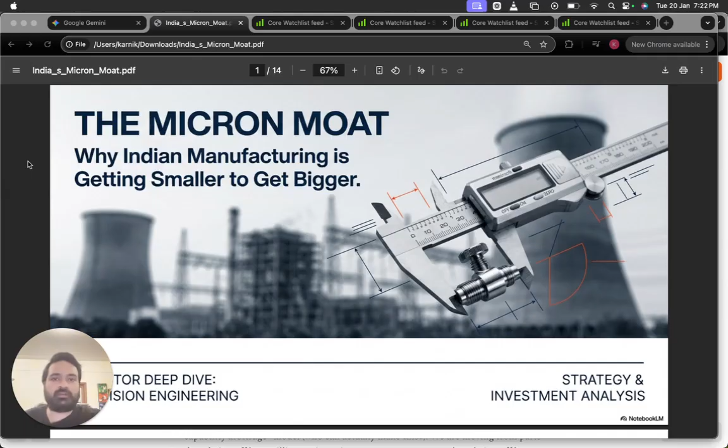Slowly, a quiet revolution started happening in the background. Our manufacturing started taking off, not only in terms of scale and capacities, but also in terms of the processes. We started innovating, we stopped just bending metal and started cutting edge engineering and technology based manufacturing. We're moving from cost arbitrage to capability arbitrage.

We're moving from manufacturing processes where being off by a couple of millimeters was okay, to now, in precision engineering, where a defect of 1 micron - which is 1/50th the width of a human hair, 2% the width of a human hair - that kind of tolerance, that kind of mismatch in expectations can lead to a nuclear reactor shutting down or a plane crashing.

This is exactly why this industry is so specialized, why it has high barriers to entry, and why players in this industry need years of audit and permissions before they get approved by their vendors or customers.

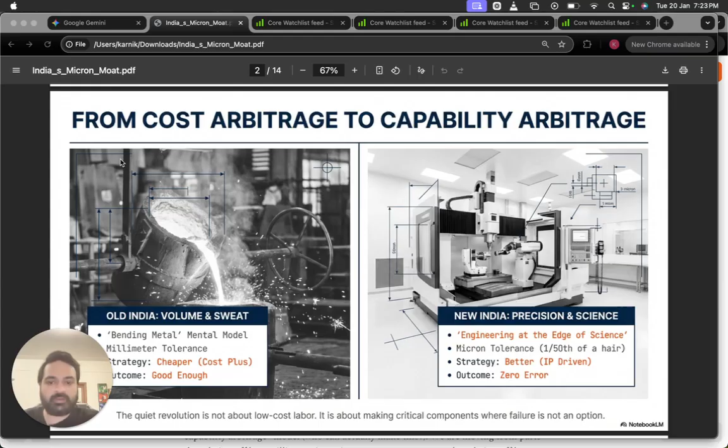This is basically the traditional old Indian model, where millimeter tolerances were okay, where we were basically following a cost plus model, and the outcome was good enough as long as we were almost there. With precision engineering, a micron tolerance mismatch can lead to catastrophic consequences.

The strategy is IP driven as opposed to cost arbitrage, and there is absolutely no room for error. So now it's not about low cost labor, but about making critical, mission critical components where failure is not an option. Because, as we'll discuss in this video, clients for many of these companies are either aerospace companies, nuclear companies, or defense companies.

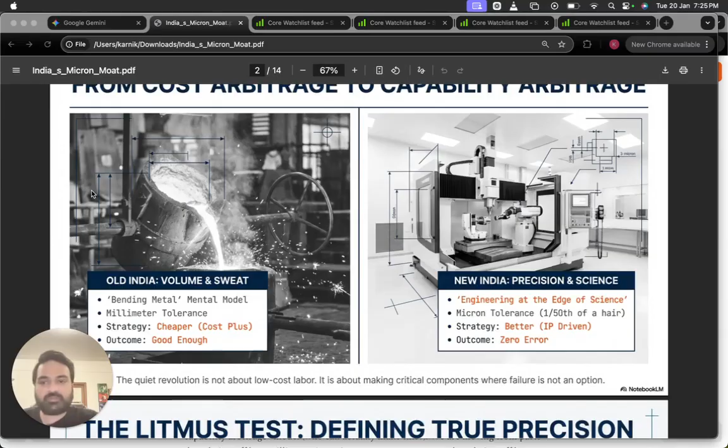And although these parts may constitute 1% of the total cost of the final product - in the case of an airplane, it might be less than 1% of the cost - despite that small cost, if there's even a slight mismatch, it can lead to disaster. So this is basically the litmus test on what defines it.

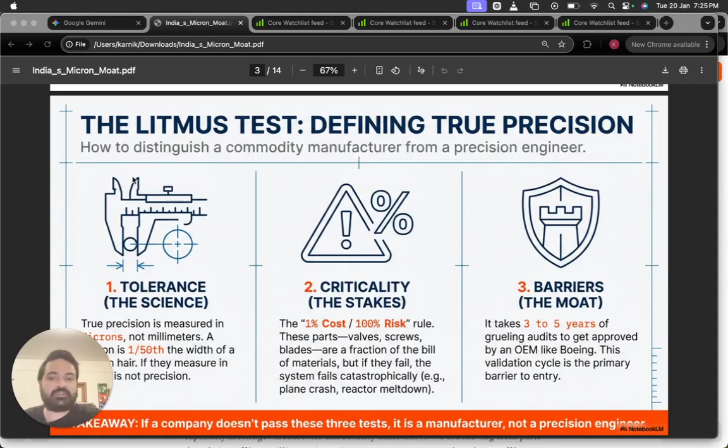A lot of companies call themselves precision engineering companies, but how do you distinguish a commodity manufacturer from a precision engineer? The first and most important thing is tolerance, because precision engineering is happening in microns, not millimeters. 1 micron, as I repeat, is 1/50th the width of a human hair. So if their measurements are in millimeters and above, it's not precision engineering.

Two is the criticality, which I just spoke about - the 1% cost, 100% risk rule. Basically, these parts are like valves, screws, blades. They're a fraction of the bill of an aircraft, or a rocket, or a nuclear reactor. But if they fail, there's catastrophe.

And thirdly is the barriers to entry. It takes 3 to 5 years of grueling audits to get approved by OEMs like Boeing and Airbus. So this validation cycle is the primary barrier to this industry.

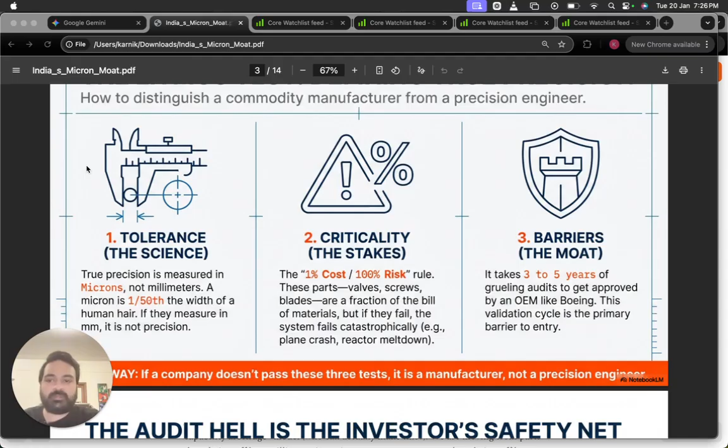This is basically elaborating that point - the switching costs are just so high that it's not worth changing suppliers to save a few pennies. Once you're approved, it usually leads to recurring orders for many years, because certification and audit also takes up to 3 to 5 years.

So the key is really getting approvals from marquee OEMs, because once that's done, that's more than half the battle - obviously, as long as your parts and components keep meeting the rigorous standards that are expected.

So this is basically the entire value chain of this industry. Let's go from top to bottom. At the bottom of the pyramid, we have companies that provide raw materials. These are exotic alloys, companies like Midhani, which is a government company. Margins here are the lowest, hovering between 12 and 14%. We'll discuss all these companies in more detail.

Next in the pyramid is the precision machining companies. At this stage, you basically take the metal and cut it to perfection using 5-axis CNC machines. Margins in this tier hover between 18 and 22%. Some companies here are OBSC Perfection, Azad Engineering, and Maini, which is a subsidiary of Raymond.

Then we have the subsystem integrators. These are companies that take many individual components and integrate them together, assembling a full module. Companies like Dynamatic Technologies make structures and substructures for Airbus and Boeing. Then you have Data Patterns, which makes electronic warfare systems and radars. And you have Sona BLW.

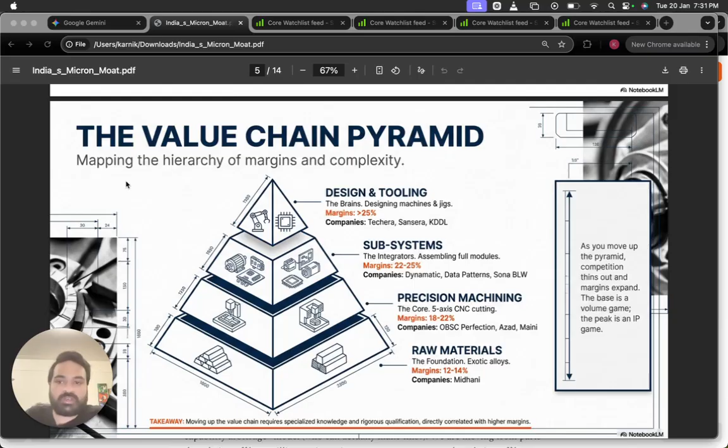Then you have Sansera Engineering, which we discuss in detail further in the video, and KDDL, which we will also discuss in detail later. As you move up in this pyramid, your competition reduces and your margins expand. You're moving from volume at the bottom of the pyramid towards IP as you go higher. Moving up this value chain requires specialized knowledge and rigorous certification and qualifications, which are directly correlated with higher margins. This is just a further elaboration on what I was just saying.

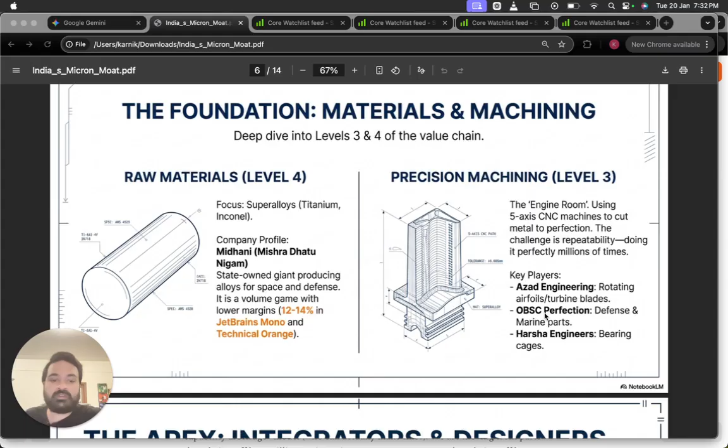These are the level 4 suppliers, which are basically raw materials - Midhani, Mishra Dhatu Nigam, makes super alloys. Then in level 3, you have precision machining. This is basically the engine room. You have companies like Azad Engineering, which make rotating turbine blades. You have OBSC Perfection, which just pivoted from auto to defense and marine parts. Then you have Harsha Engineers, which makes bearing cages.

Then in level 2, we have the integrators. These are companies that basically assemble full working modules. This and level 1 have the highest levels of stickiness. Examples are Dynamatic Technologies, which makes aerostructures for Airbus, and Data Patterns. Then level 1 is basically Techera, Sansera, KDDL.

Now let's deep dive into 5 companies that I personally find interesting in this sector.

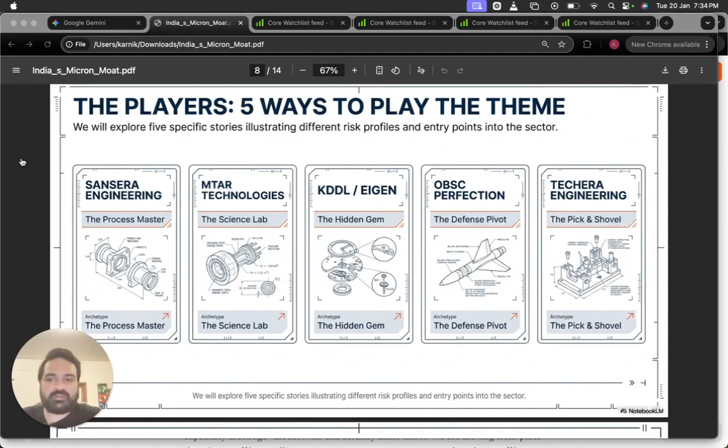Which we'll discuss now. First company we'll talk about today is Sansera Engineering. Basically, Sansera started by making auto components, connecting rods, but they became obsessed with efficiency. They designed and developed their own robotized CNC manufacturing lines. This gives them vertical integration and a massive cost and speed advantage. Using their expertise, they've pivoted because they found an opportunity in aerospace, and they have started winning orders from marquee OEMs like Airbus and Boeing.

There's also further optionality as they are targeting the defense and semiconductor industries, which are all three industries - whether it's aerospace, defense, or semiconductor - poised for growth. These are one of the good companies from India you can play these sectors through.

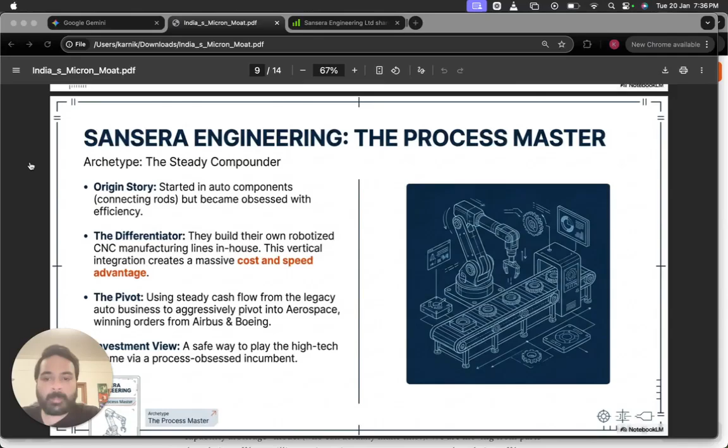The next company we'll talk about is MTAR Technologies. If Sansera Engineering was a factory, MTAR is a laboratory. They don't want to make simple screws and components. They want to make 50 different parts which are extremely difficult and complex in making. They specialize in exotic materials like Inconel and nickel.

These materials destroy normal cutting tools. Their portfolio is commendable in their tie-ups, including rocket engines for ISRO, nuclear reactor grids for the Nuclear Power Corporation, and hydrogen fuel cells for a company called Bloom Energy based in America. They make the hot boxes for these fuel cells.

Their risk, or another way of looking at it, their growth triggers possibly come from their dependence on Bloom Energy and the green hydrogen race. With ISRO and nuclear power, they were getting orders which were sporadic and not regular. With Bloom Energy, at least the orders are frequent and regular, but they're very dependent on them and need to reduce their revenue concentration from this one client.

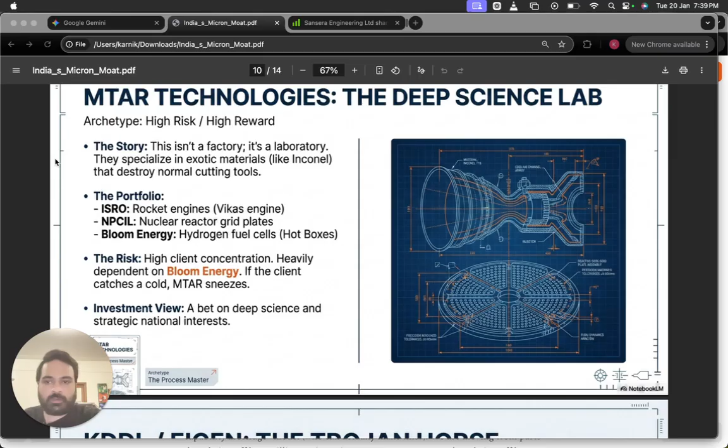In conclusion, MTAR is a bet on strategic national interests, and it's also a bet on deep science and India's engineering prowess.

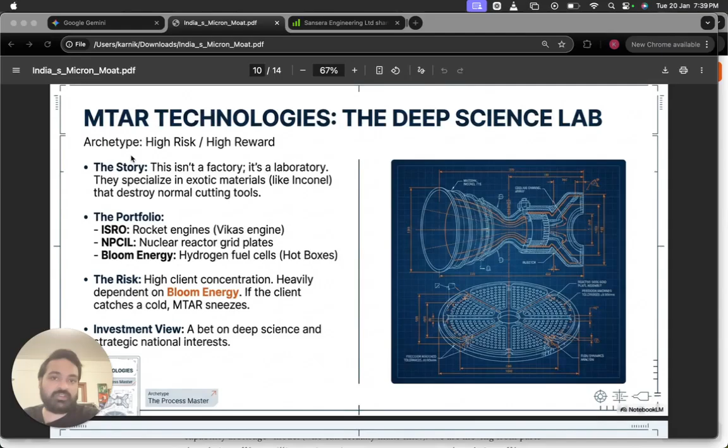The next company to talk about, who I think of as a Trojan horse, is KDDL. If you ask anyone, it's basically a watch retailer. They own the luxury watch brand Ethos, India's largest luxury watch retailer. But hidden inside this company is a subsidiary called Eigen Engineering.

This company applies watchmaking precision, Swiss watchmaking precision standards, to other industrial parts, from hairsprings to aerospace electrical connectors. They have the heritage and expertise of making very precise metal parts.

Recently, they acquired a subsidiary in Switzerland called Estima, and this acquisition gives them a direct line into Europe's high-end watch supply chain. So they'll be going from making their own watches to making parts for watches for various manufacturers, along with their other engineering business.

So if you look at KDDL, it's basically valued like a retail stock, but hidden inside might be a highly specialized precision engineering component.

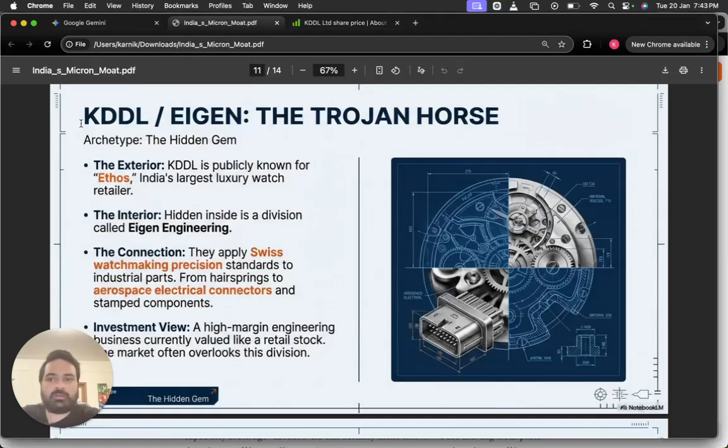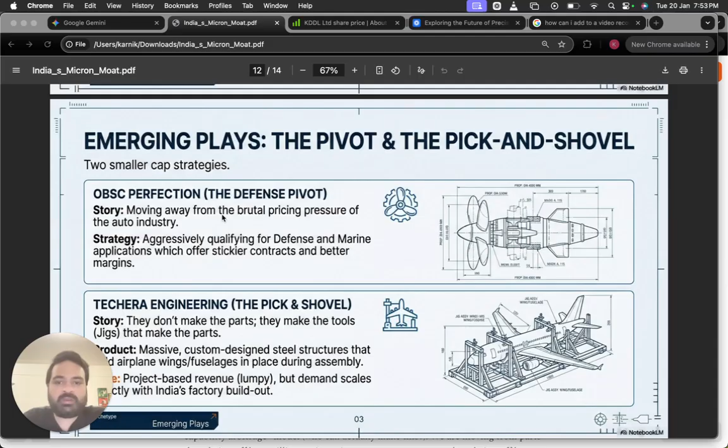Lastly, we'll talk about two companies. These are both very small companies with low liquidity, so be extra careful while studying these companies. The first is OBSC Perfection. They used to make parts for the automotive industry, but have pivoted towards defense and marine contracts. This reduces the cyclicality of the auto industry and offers them stickier contracts with better margins.

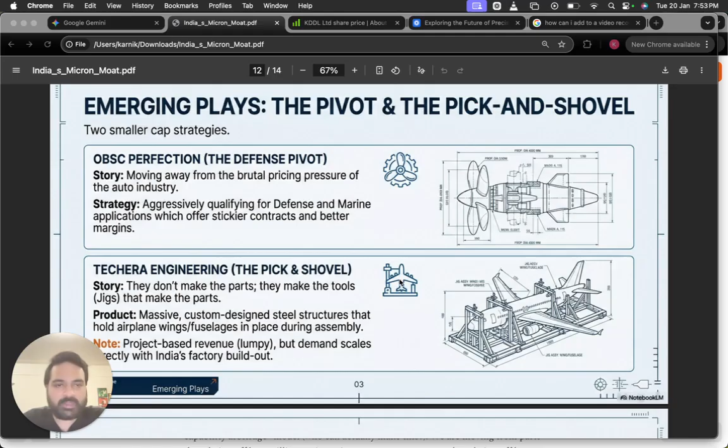The second company is Techera Engineering. They don't make the parts for precision engineering, but they make the tools that make the parts. They make jigs which are used for planes when they're being assembled. So these were basically the five companies that I wanted to talk about.

So what is the investment thesis for the sector? One is the high barriers to entry. Secondly, the industries that they serve, which is very often either auto, defense, aerospace, semiconductor, or medical industries. Most of these industries are poised for many years of growth and have strong tailwinds.

Another trigger is the China plus one trigger, as many global OEMs are looking to reduce their dependence on China and looking for manufacturing outside of China. India is the only option with that level of scale and English-speaking engineering talent to fill this gap.

Things you need to watch out for in this industry: one, it takes time. A lot of these companies take years of qualification before they get approved, and it's very capital intensive during these gestation periods and trial periods. So financials might be depressed, stock price might be flat or stagnating for a long time before any meaningful inflection.

So look out for growth triggers. Metrics to look out for: returns on capital employed, how efficient they are with their capital, and also the composition of the order book—what percent is coming from defense, what percent from auto. Usually when the defense contribution is more than the auto contribution, this can be a critical shift for these companies.